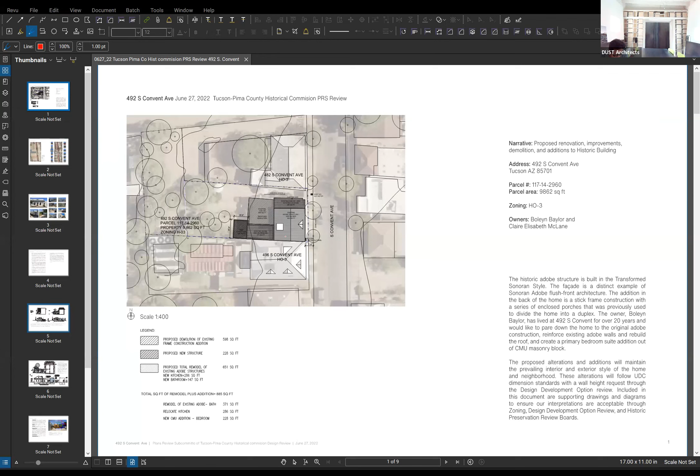Today we have 492 South Convent. It's a small project remodel, and we've been working with the client for some time to find what sort of remodel for her. She's a single woman living here, retired, and she's had this house for about 30 years. It is a row house, transformed Sonoran style, located just south of Kennedy and north of, I believe that's 17th, on Convent Avenue. I'm gonna just quickly zoom into this site plan here, if I can find my mouse. Sorry, trying to navigate. All right.

So in this aerial view, we have the existing house here, and that's an original early 1900s. At some point, this was added on, which I heard was a little cafe at one point. Previous owners had then extended an adobe addition here, and that is all existing. And there is a framed porch that got added on in about 2 consecutive times. We're unclear when, but Jody's maps show that they were within the period of significance. This add-on is just under 600 square feet. It's 2 series of porches that I'll show you in photos a little later. But I just wanted to give a sense of the complexities and what we're dealing with.

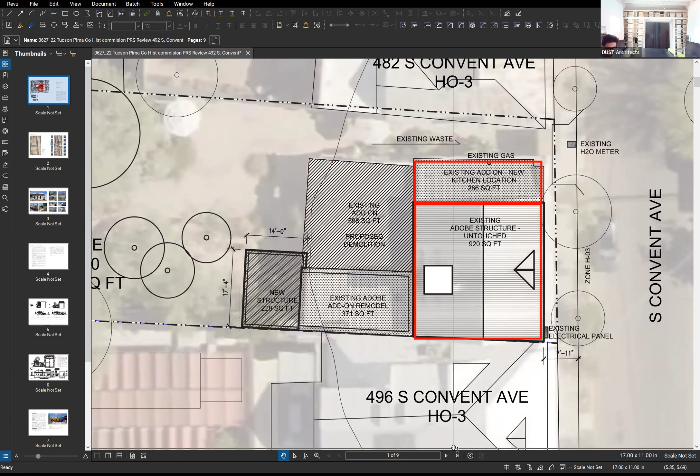This project is looking to propose to add a primary bedroom on the back end of the existing adobe and proposing to demolish the framed porches that were enclosed over the years. So development zone, we're at the interior, as I mentioned, between Kennedy and 17th. Most everything on this block is transformed Sonoran row houses, with a few exceptions here and there.

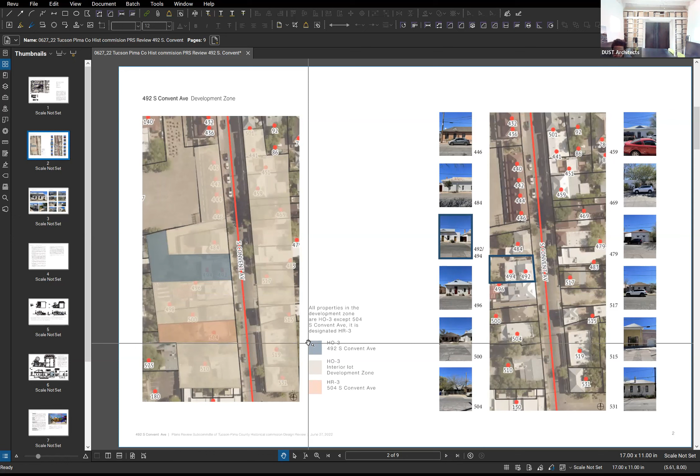A little more detailed look at the property. The big image on the left is the front as you approach. It had operated as a duplex when she purchased it over 30 years ago, but she's been transforming it into a single family residence. It still holds 2 meters, 2 addresses, 2 electrical boxes, some of which she's hoping to streamline.

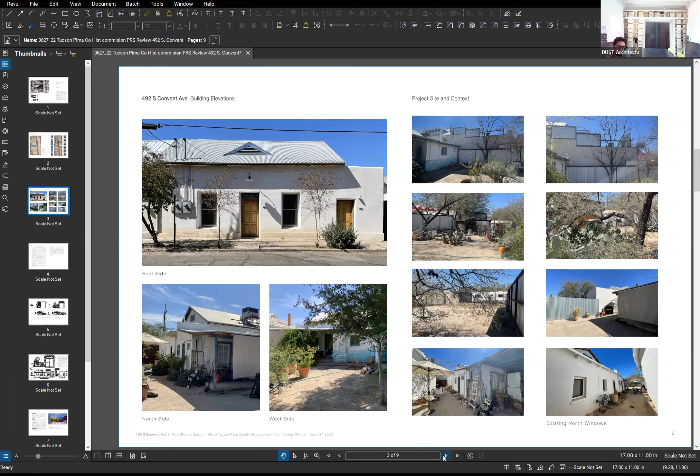With that construction over time, when I get to the floor plan, you'll see that the duplex split up the living arrangements. As it is now, there is no bedroom per code, meaning she doesn't have her egress access. And when she gets this appraised for refinances, she's having difficulties with the banks valuing it because there is no technical bedroom, even though there's plenty of rooms there. The images on the bottom are shots of the 2 add-on porches. I'll see if I can highlight that here. We believe this one was added on first, in that section there.

And then this back one that's still partially open was added on at a certain date. So as you can see, in typical fashion, it started with a low pitch roof and then it got shallower and even lower. And when you're inside, the floor steps down. She'd like to remedy that as she's getting older in age. There's a lack of access to daylight and the steps are a little bit cumbersome for her in there.

And so part of the remodel is to level out the floor as one finish floor plane inside. As we do this, we have height issues. The very back porch is already below 7'6" as habitable space. As we raise it, that height gets shorter. And so in the many ways we've studied it with her and her budget and her lifestyle needs, it's becoming more apparent that the project, the property, and her lifestyle would benefit from the removal of these enclosed framed additions.

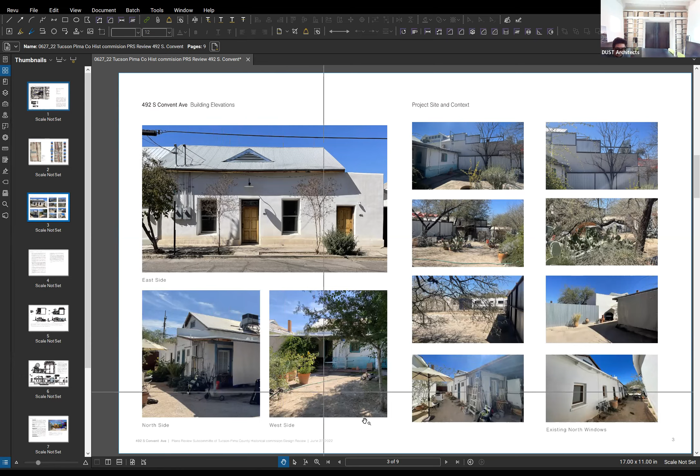That's the bulk of the scope of work. We're moving the kitchen from one room to another, and then also remodeling the bathroom. So there's some plumbing work and relocating water heaters, etc. Zoom into this plan on the left. This is the existing condition. We've hatched the portion that we're proposing to demolish.

With the wall thicknesses, you can see that at least part of the owner's ethos was she'd like to preserve the adobe. We don't want to touch that. And in fact, in demolishing the porch and the sloped roof structures, we will have to stabilize the existing adobe. We're proposing CMU bond beams, and in that, also raising the height of that add-on as well.

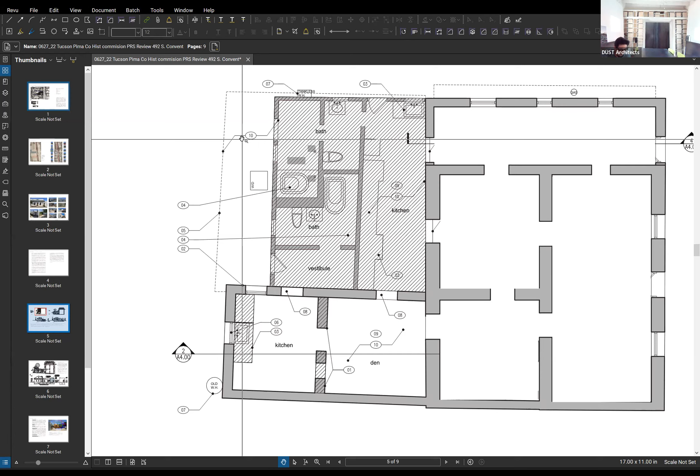As Jody mentioned, we had 2 reviews with Barrio. I'll share with you the first option. We were trying to just, what we thought was, minimally add on and make it integral. So we were adding this addition of a bathroom that then made this long extension, but with conversations with Barrio and sort of the desire to make the new and the old express themselves separately, we revisited that.

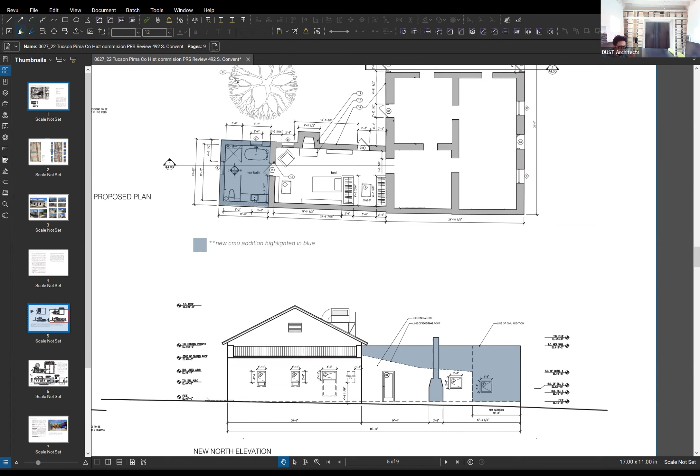We also had proposed in that one to modify these existing historic windows. Where did my mouse go? Right here. But we had decided not to touch those, so they're going to stay as is.

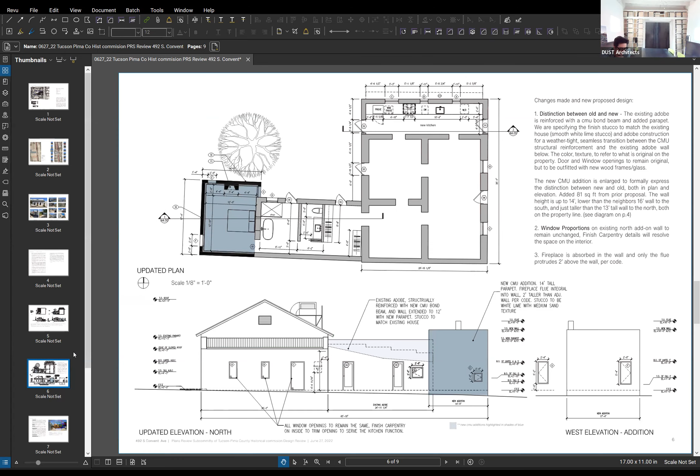The sort of diagramming, this was more, I think, catered towards the Barrio, looking at the existing adobe back tucked in this diagram, if you can see my mouse. That's on the zero lot line, sharing it with the neighbor. The neighbor has a constructed wall and fence that is 12 feet plus, up to 16 feet tall. And her neighbor to the north has a 13-foot tall.

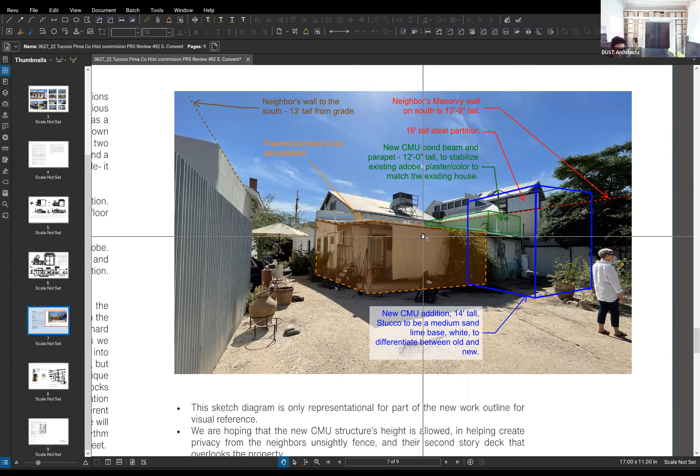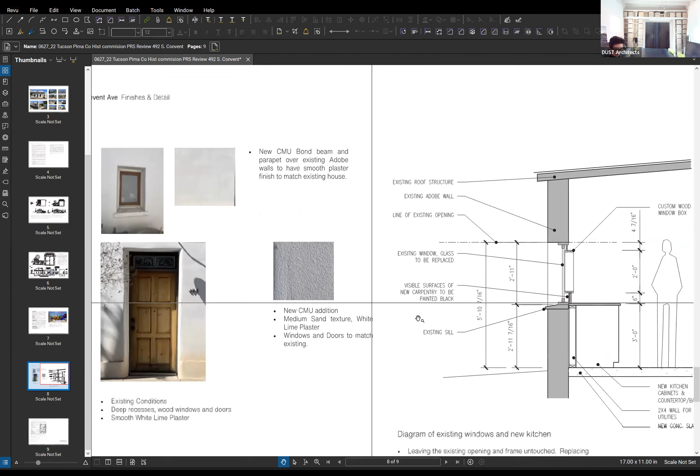This is just a quick sketch diagram of how we were going to address the historic window, keeping the same proportion on the outside, not filling it in, replacing the frame and glass to match what was there, which was wood. So making that exact same thing back, but getting insulated glass. And on the inside, we're just going to rely on finished carpentry to accommodate the kitchen.

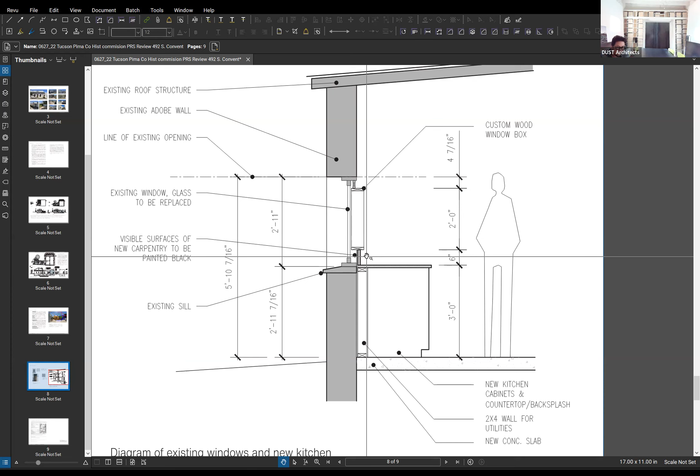As the counter is taller than all those windows, we're just going to frame out a finished carpentry box that reframes the opening in the window. So on the outside, it looks historic, untouched, and on the inside, she'll have more of a modern feel. That is the bulk and the scope of that work.

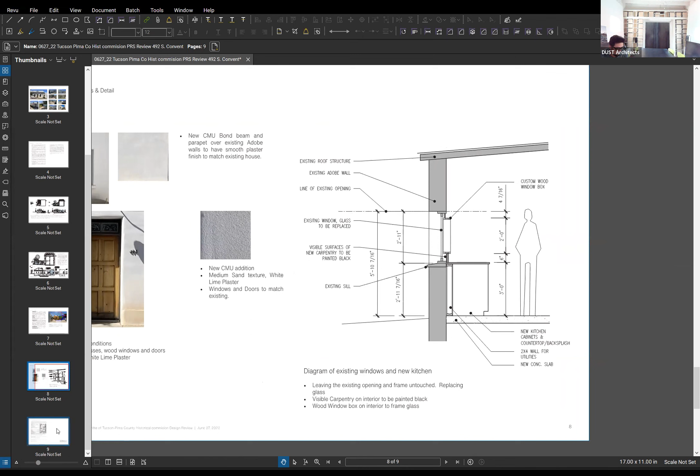Thank you. Commissioners who would like to comment or ask questions, clarification? I actually just have one question. And thanks for the presentation.

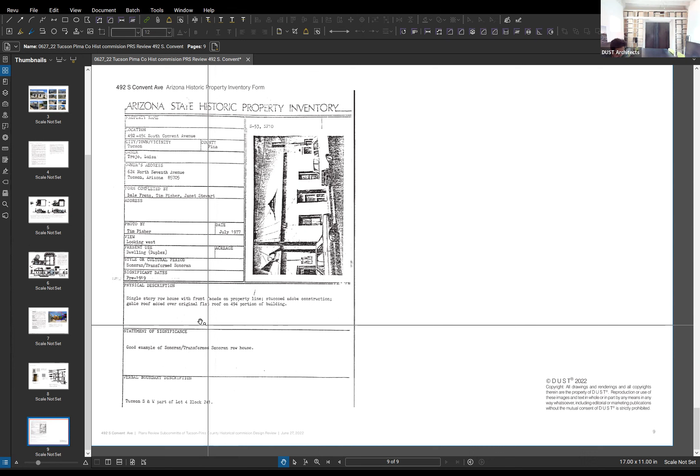That was very clear. My question has to do with the stucco finish on the original addition. You said that was going to match the original house, and I guess you're going to make it match the original house, but I'm wondering what the current stucco finish is and if that is distinct from the original house. Sure, good question. Let me go back to the page with the photos.

And maybe, this is Jan, if I could just add a related question, because what I understood was there's the existing addition, but then there's that bond beam and kind of squaring off the top of the existing that you were talking about not distinguishing. Correct. I'll touch on that. Okay, thank you. To Savannah's question, the front of the house, the main 900 square foot adobe cube that was the transformed Sonoran, that has a smooth, really smooth lime plaster currently.

What it had when she purchased it, I don't know. She's relinquished repairing and restoring this old thing until we could figure out what we can do with it. If I zoom in, you can see that it is a textured cementitious plaster, but it has some buckling at the bottom. I forgot the terminology for that, but as the adobe settling and the cement plaster sort of peeling away from it. So there's a cementitious plaster; it's not a sanded texture, but it's definitely textured.

And you don't see large swoop trowel marks, but there is some variance in how the concrete was applied. So that's its existing case. We were proposing, and this kind of touches on Jan's, and let me go to that diagram if we hold these photos in our mind. So that existing addition is here. The dashed line right above is showing where the old roof line went.

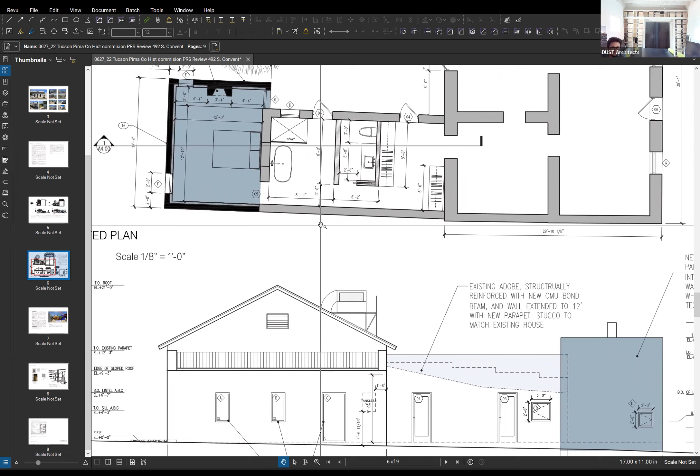Yeah, thank you. So I just have a question about the other side of this wall. What is that now? I can't quite tell what's going on in the interior. Is that a hallway that's going to connect the main house to the new addition? That whole new addition becomes a sort of pass-through hallway, closet, bathroom. I gotcha. Okay, I understand. Yeah, I think it's great. I'm ready to go. This is wonderful. Good job. Awesome, thank you.

And I just had one more question. I think you answered it. It wasn't as clear on the plans to me, but none of the outside windows or openings are being changed in terms of how they present outside. Correct. None of the existing ones. We had proposed it on our first pass, and through conversations with Barrio and with Jody, we decided to figure it out with carpentry on the inside. Okay, thank you.

So it sounds like we're talking about differentiating the middle structure with a different texture from the other two. And I believe Barrio was reminded to call out the reduced setbacks as part of their motion as well, so it's probably something we should also include. Was there anything else that folks were thinking needed to be in a motion?

Well, I just had a question. So at this point, you're not sure if you're going to completely remove the concrete stucco or not? On the existing Adobe that we're adding the CMU, we wanted to remove the existing concrete stucco because in parts it's peeling away, separated and crumbling, so we want to pull that back, and when we add the new bond beam and the new parapet, give it something new that ties it all together. And that's the only one you're doing that to, correct? Correct. Okay, I just wanted to clarify.

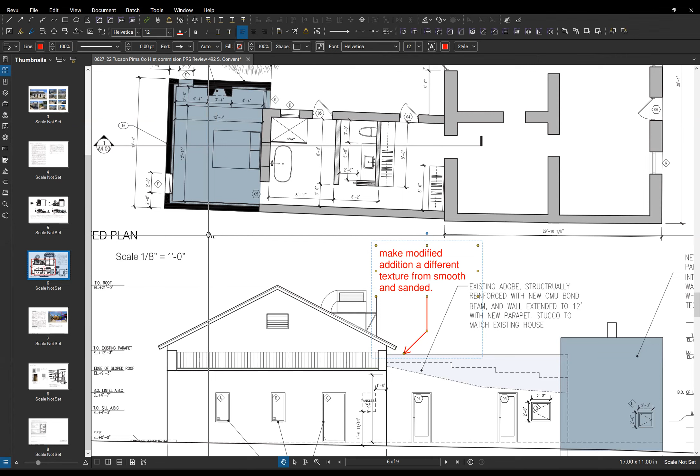Thank you. Sorry, to touch on that: if the demolition of the frame enclosed porches is approved, we do have patches on the original structure that we'll have to take into consideration. Okay, but those would just be the same material as already existing. Yeah, match existing. Okay, I don't have any other questions. Are we ready for a motion? Is someone willing to make a motion? I'm ready and able. Great.

All right, on the matter of HPZ 22017 at 492 South Convent Avenue, I move to recommend approval of the project as presented, with the inclusion for the middle Adobe addition to provide a distinct texture to differentiate the additions over time from the original, and approval of the reduced setbacks proposed.

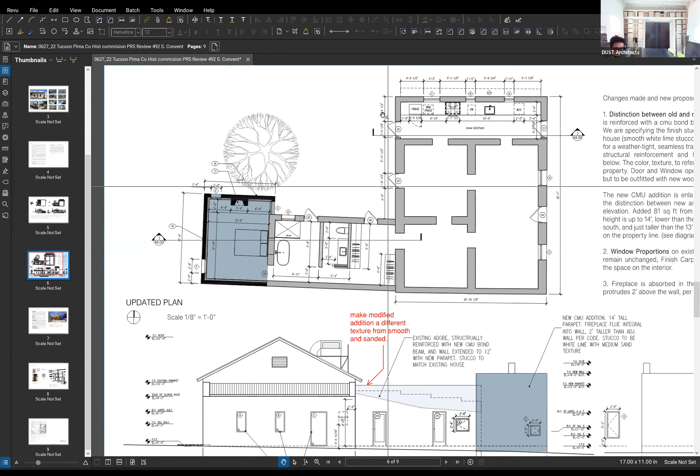A second? This is Ricky. I'll second. Great. Any other discussion, or are we ready to vote? Savannah? Aye. Ricky? Aye. Joel? Yes. Jan, yes. Motion passes 4-0, and Jody can walk you through next steps for moving through the permitting process.

Okay. So we will forward both the recommendations from Barrio Historico and PRS to the director, and he will issue a decision letter. From the date of the decision letter, you'll have a 14-day appeal period. During that 14-day appeal period, the applicant or the homeowner can appeal, PRS can appeal, or Barrio Historico can appeal.

If there is an appeal, there's a fee associated with it, and it will be docketed on the mayor and council agenda for them to either uphold the appeal or not. If there are no appeals, once the appeal period is expired, then you can submit the revised plans per the conditions on the decision letter and finish out your permit.